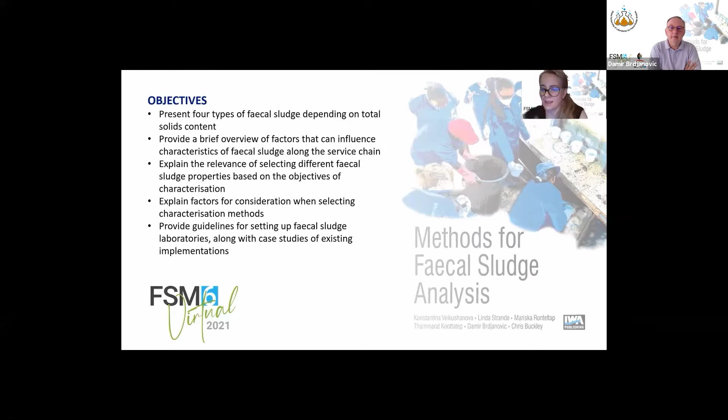Defining standardized methods for the characterization of fecal sludge is challenging due to the high variability of fecal sludge from the macro to micro level. In addition to the variability, different methods for sample preparation and analysis are appropriate depending on the type of fecal sludge. For example, samples with higher load, higher total solids content coming from dry on-site sanitation systems, such as pit latrines, will require different preparation than samples coming from wet systems, such as septic tanks, that would have much lower total solids content.

The solids content will also affect whether it is relevant to conduct volumetric types of analysis expressed in milligrams per liter, or gravimetric types of analysis expressed in grams per gram total solids of the sample. Qualitative observations of different moisture or total solids content of fecal sludge range from dilute and watery to slurries that are still pumpable to dewatered sludge that is shovelable or spadable, but not pumpable.

Although these differences do not have clear boundaries to be precisely defined, it is useful to define approximate ranges of type of fecal sludge based on total solids. The different ranges can help us to select the appropriate methods for analysis and also whether we want to undertake analysis volumetrically or gravimetrically. Here are provided the 4 types of fecal sludge that are defined in the book.

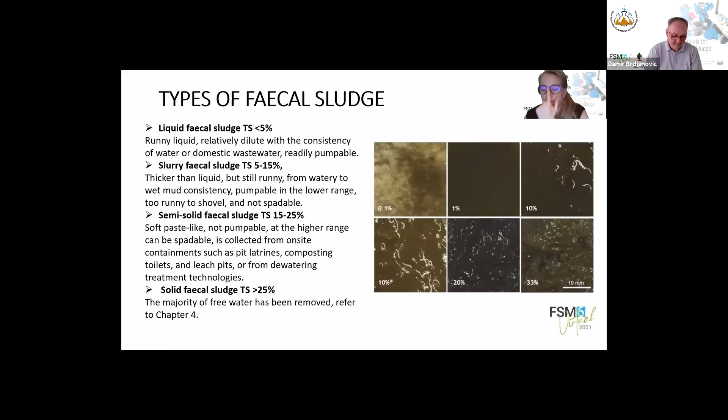When we speak about properties of fecal sludge and selecting of methods for characterization, we have provided different steps that need to be followed in order to undertake the characterization process correctly. Based on the defined purpose and the objectives of the fecal sludge characterization, the appropriate method for measurement of properties needs to be selected. After defining the purpose, objectives, and the desired properties to determine the characterization process, the next step is to select appropriate methods for analysis, taking into consideration the total solids content, the required level of accuracy, available resources, and laboratory capacity.

The sampling plan prior to analysis is discussed in Chapter 3. We have provided 3 main groups of properties in this chapter, which are chemical and physical-chemical properties, physical properties, and biological properties, focusing mainly on pathogens in this book. And these reflect on the different methods provided in Chapter 8.

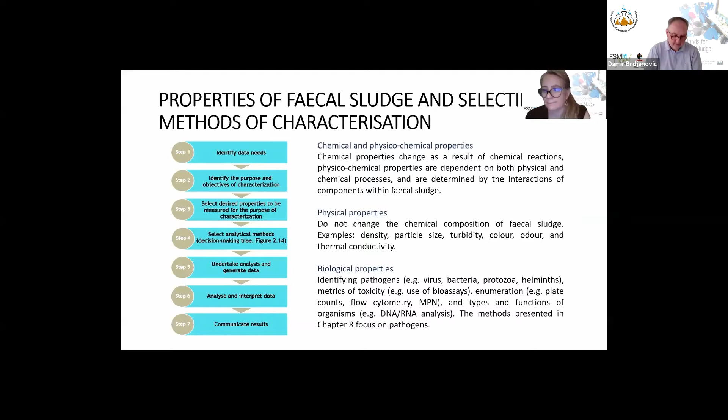And finally, we have provided a guideline of how to set up laboratories for fecal sludge analysis. Analytical methods alone are not adequate. To provide reliable and repeatable analysis, we also need these analyses to be conducted by trained personnel and in facilities that are managed well and have relevant and strict standard operating protocols.

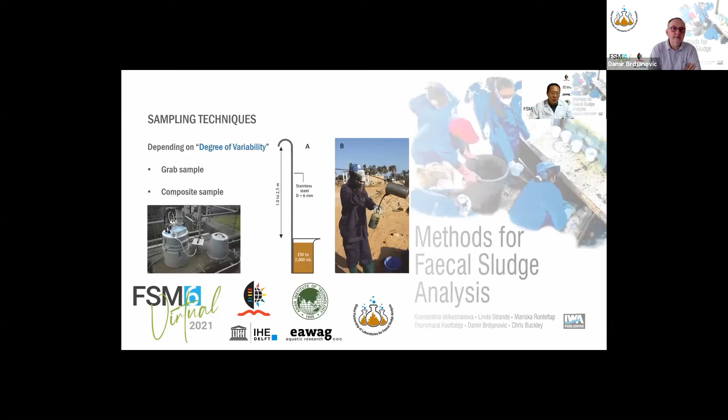This guides us to the devices that we use in different kinds of techniques. An example is using simple beakers connected to stainless steel poles, or using automatic samplers. That is also possible, but the cost would be different as well.

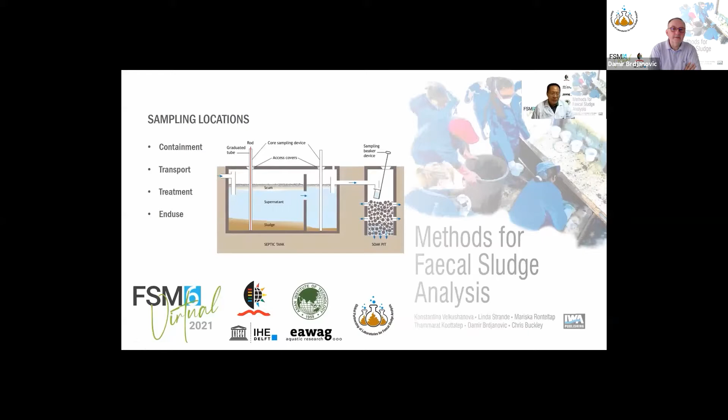We need to carefully consider how we select the location of the samples, so the sampling technique would be different, and we can select different kinds of devices to collect the content inside the septic tank. And in the transportation system, like the truck, how can we get that? It's not that easy at all. We cannot just get it from the valve, or if we'd like to get the different layers of the sample inside the tank, a tube would be necessary.

For a treatment system like the conventional wastewater treatment system, we need to prepare carefully whether we just use a grab sample or a technique to collect the sample to represent the influent of the treatment units. And within the unit itself, we also need to think carefully how we select the sampling schemes so that we can represent the treatment performance from the top to the bottom of the treatment units.

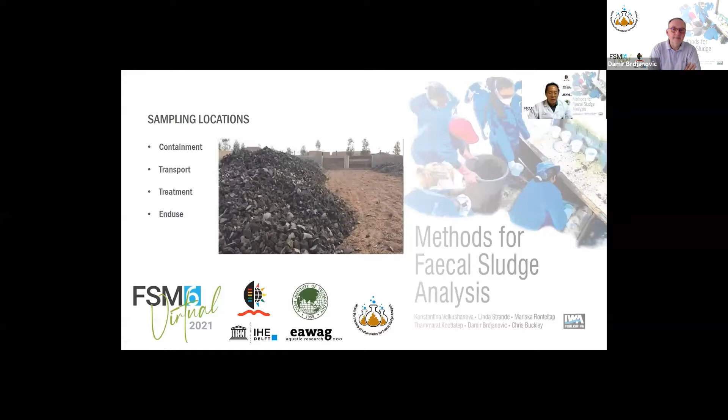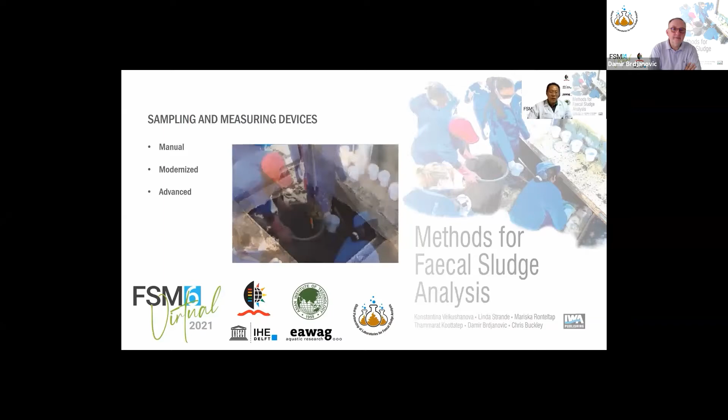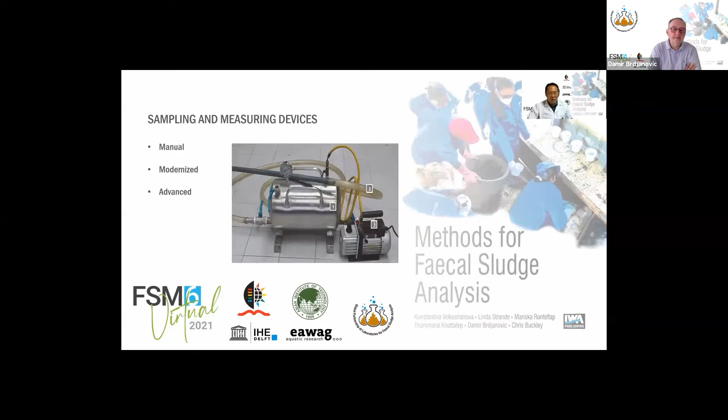And also that after treatment, the end use of the treated products like the dry sludge, how can we ensure that our dry sludge can comply with the standard? Of course, from the surface to the bottom, the characteristics of the sludge would be different. But to represent that, we need to have an appropriate plan to collect the sample appropriately, which we explain in the chapter's details, from the beakers to the buckets and also to the tubes, and together with that, the vacuum tanks that connect to the tubes, and then we can select the depth of the sampling units we would like to collect the sample from.

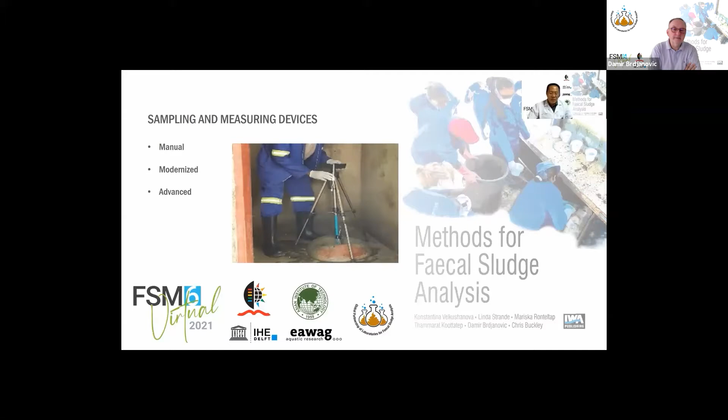And also we can even use very advanced equipment like laser techniques equipped with these kinds of tripods. And then we can measure the contents inside the tank without disturbing the content of the units. And then we can connect to mobile phones and report right away the content inside the tank. And with those schemes, we also need to be aware that inside the tank there would be different kinds of contents: only solid, or with liquids, or very dry solid as well. So with these kinds of contents, we need to draw different sampling plans to ensure that your sludge samples can represent the characteristics of the contents.

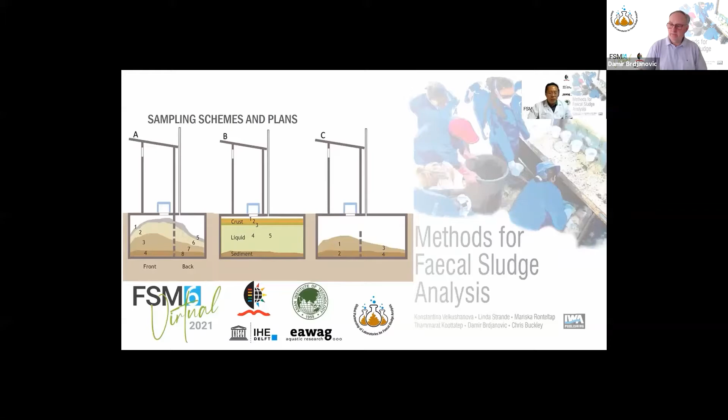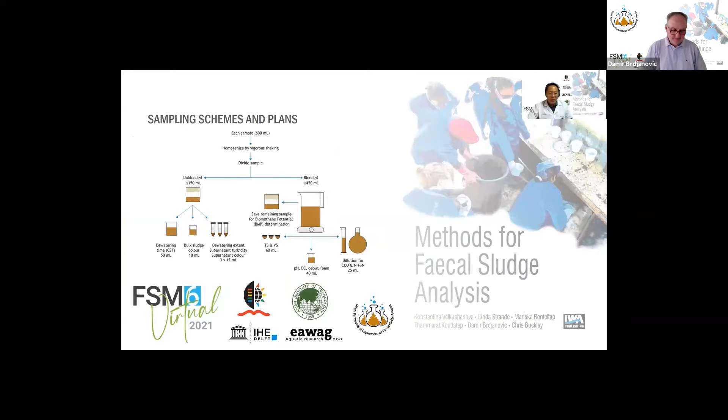And after collection, we also need to manage the sample appropriately depending on the parameters you would like to analyze for, whether you would like to get blended or unblended samples, and then you can decide for each parameter. And we need to provide enough PPE, or personal protective equipment, not just the mask like this, but perhaps inside the treatment units we may need to use a very advanced mask with different kinds of techniques.

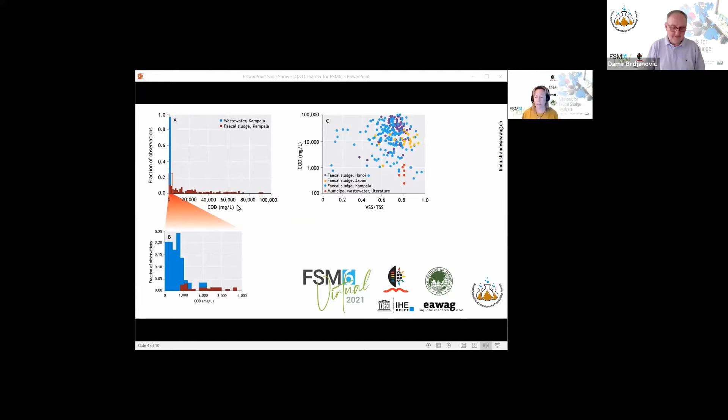The problem with assuming a normal distribution and using averages and standard deviations is, for example, with an average value of 10 and a standard deviation of 25, about a third of randomly sampled values would be predicted to have negative values. And this is clearly not meaningful for concentrations of constituents in fecal sludge, such as total solids, volatile solids, or COD. There are many other examples given throughout the book about the variability and distribution of fecal sludge. Here's another example from Chapter 2.

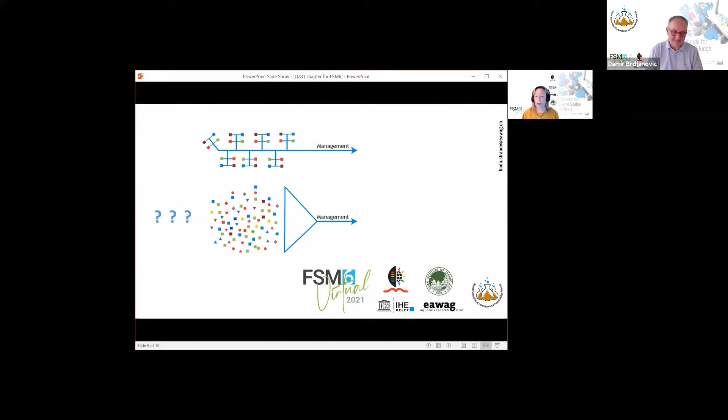So we have these diverse characteristics. How can we use them to make reasonable projections? If we just make citywide averages, we know now that it will not be meaningful. So can we use statistics to find categories of data that predict or separate out different ranges of characteristics and accumulation rates in order to average out this complexity and make reasonable projections?

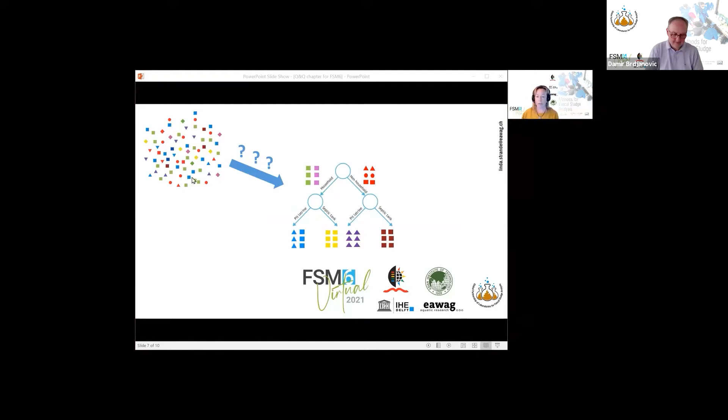For example, what if fecal sludge from households in a city always had a higher total solids, or if septic tanks always had a lower total solids? That's why we're looking at categories of demographic, environmental, and technical, or DET, forms of data. Demographic information such as income level is not a cause of why characteristics might be different, but there could be a correlation due to things like quality of construction or different flows of wastewater going into containment.

The SPA part of SPA-DET refers to spatially analyzable, meaning that these types of DET data can be mapped and used to make projections about characteristics and quantities of fecal sludge that accumulate, for example, in different neighborhoods of a city. To account for the non-normal distribution of data, we use the confidence interval around the median, not the mean, in order to separate categories of data to use when making weighted averages, for example, high and low income level, or septic tank and pit latrine.

We can then use these values to make a weighted average for areas that we are planning for, taking into account the different categories of data. There are further example calculations of loadings in Chapter 5, and although there is still uncertainty in projections calculated in this fashion, they are way more accurate than just taking an average of all reported values.

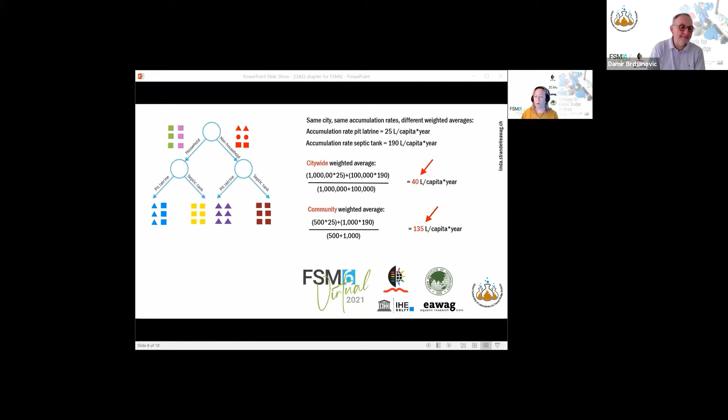The resolution of planning projections only needs to be as precise as the decision-making process requires. Citywide inclusive sanitation planning does not require the same level of precision as process control or optimization of treatment plants.

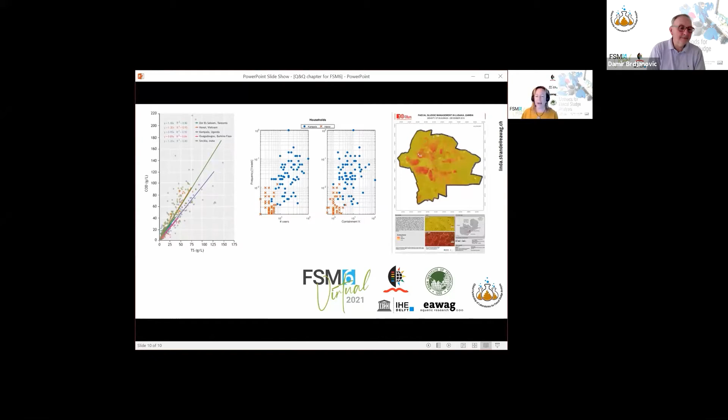In the book chapter are also discussions about exploring your data to find additional statistical relationships that could reduce costs of data collection or laboratory analysis, and looking forward to possibilities for remote sensing for data collection and more complex modeling. I hope that you find it useful, and I'm looking forward to hearing your feedback.

Hi, my name is Damir Brdjanovic, and I will say a few words about Chapter 6 of our book, Methods for Fecal Sludge Analysis. This chapter primarily addresses approaches to modeling of on-site fecal and septic sludge containment and treatment technologies such as portable toilet, a pit latrine, and a septic tank by making maximum use of the extensive knowledge gained during more than a century of research on wastewater treatment and more than 3 decades of experience of using biological wastewater and sludge treatment modeling.

This analogy is possible and logical because of the fact that in both cases, urine and feces are the main raw materials that enter into the sanitation system, be it sewered or on-site, and that the combination of physical, chemical, and biological processes is an essential component in the treatment in both cases. As the two sectors are presently rather polarized, such an extension enables further integration of sewered and on-site sanitation technologies at the system level, which is an essential step towards a citywide inclusive sanitation approach.

Therefore, this chapter focuses on the development of approaches on how to model the selection of the most common sanitation technologies for fecal sludge containment and on-site treatment, recognizing the fact that this area of interest has the most complexity and the least understanding of all the components of the urban sanitation chain.

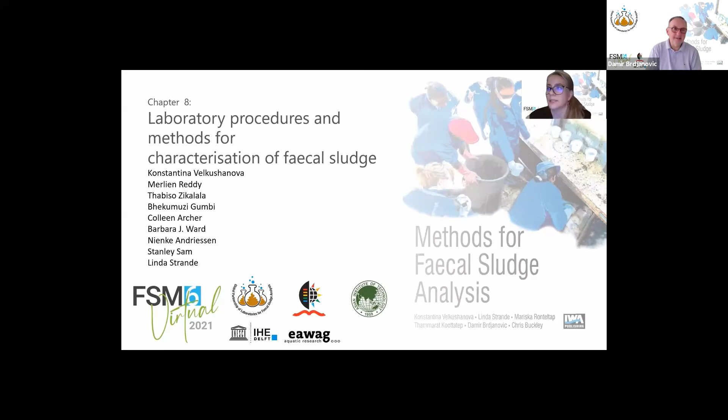In this chapter is presented a general overview of the factors to consider when conducting the laboratory analysis. In section 8.2 is provided an overview of the occupational health and safety measures for risk prevention. Section 8.3 summarizes quality assurance measures, and section 8.4 provides an overview of the included methods and guidelines of how to select methods linked to chapter 2. In section 8.5 is provided information about packaging and shipping of fecal sludge samples.

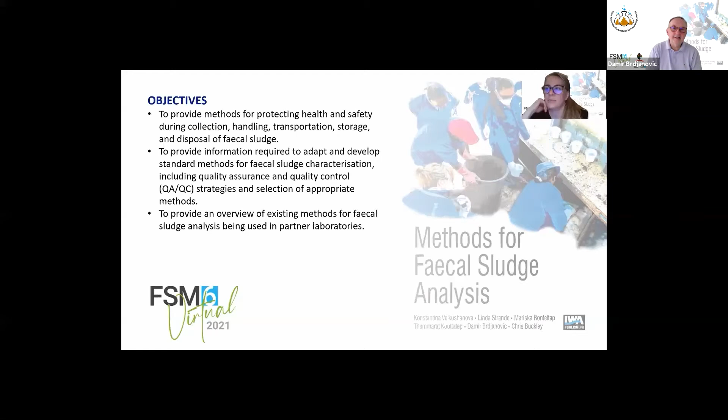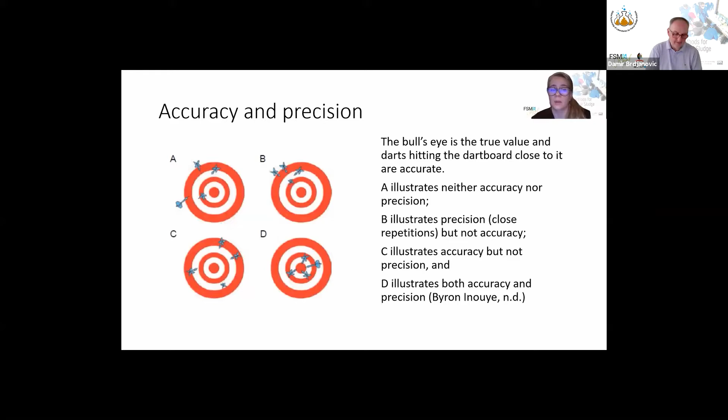And in section 8.6 are included methods for chemical and physicochemical characteristics. In 8.7 are included methods for physical and mechanical characteristics, and 8.8 contains methods for biological characteristics. As I mentioned to you, there is a number of considerations that are focused on quality control and quality assurance. And this is just one of the examples that we have included in the book. This figure actually represents what we often see in the fecal sludge laboratories. For us, it's quite crucial to understand where we stand with the analysis and how important are the quality control and quality assurance measures.